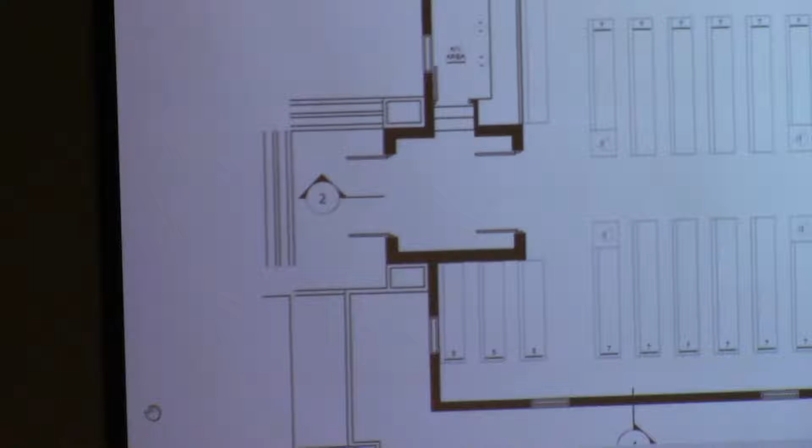Another item we've looked at is tucking this area in here for the new audio-visual soundboard. It would put this area in the back of the church, in a spot where they could see and hear the service, but tucked out of the way so they can monitor the service, the volume, the lights, et cetera. So that's the second component for the AV, the audio-visual sound control area.

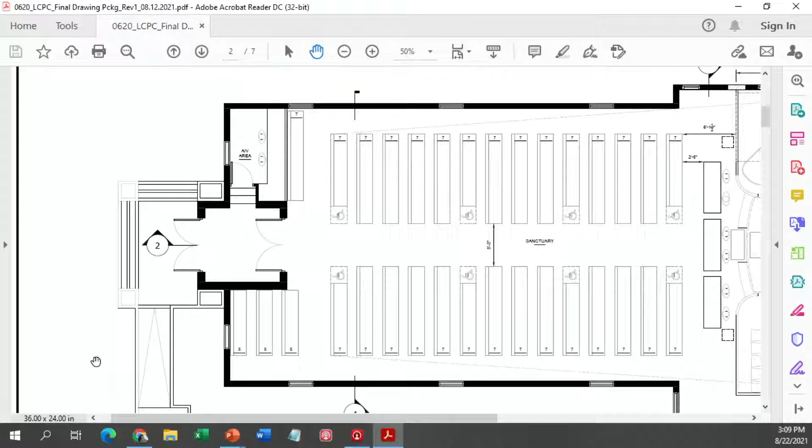Now, one of the things I'd like to do, and I apologize for not doing this from the beginning, Bart and Ken, if you could zoom out and show the whole plan, I wanted to set the precedent. Looking at the perimeter of the building, this notch here and this notch here represent the end of the original building, the original sanctuary, and where the Sunday school part or offices begin. Does that make sense for you guys?

So what we were able to do is grow the sanctuary and the stage area right here. We're taking this area out and moving back. So for reference, from this notch backward is the sanctuary area, and from this notch forward is offices, classrooms, etc. Now, what did we do to the sanctuary, and how did we accomplish this?

We're at the front door, we've tucked in the AV, and we've got a central aisle. Now what we have is two aisles, and the pews go all the way to the wall. If you look here, the central aisle is 6 feet wide, and the side aisles here are 3 feet wide.

So from this area back, what I want to point out is two additional areas for storage. Whether it's choir, handbell, or sanctuary, we were able to accommodate a storage here and then a closet storage here as well.

One of the things you'll see in this back area is a set of steps here. Because of the way we have the choir area on risers, so that everyone can project that beautiful voice into the sanctuary, each one of these areas is a step up. So when the choir filters in, they've got to be up at this level.

But here we have used this side or aisle area to accommodate the installation of an ADA accessible ramp. And as you see, tucked here are the stairs up. But once you start here and rise up, all this area is on the same level. This area starts to rise up with the steps, and then these steps of access meet it in the back. So what we've tried to do is accommodate multiple things with the steps, the risers, and the ramp, to accommodate as much as absolutely possible.

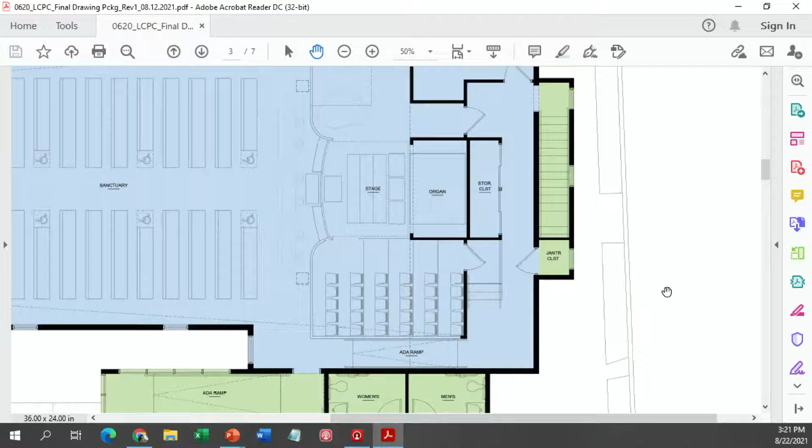Now, one of the things that is new is this back area here. And when I say new, everything we've talked about to this point has taken place within the existing structure. Ken, if you could zoom out so we could see the whole thing, that'd be a great indication.

So the color coding of all the light blue here, that is within the existing perimeter of the church as you see it right now. The only new exterior additions are the small sliver of green here in the back, which is the back stair access that will allow circulation from this level down to the lower level. We will bump out in the back just enough to accommodate the stair, and also accommodate a janitor's closet for mop, sink, and cleaning supplies for the sanctuary level.

So the light blue is all existing. The green is new, and we'll get to this area next.

But before we move on to the lower level, let's recap: central aisle, central entry, AV crow's nest soundboard area, increased seating, ADA access around the aisles, area for handbells, increased stage, piano, organ, storage, 30 in the choir, 18 in the risers, ADA access, additional storage, and basement access.

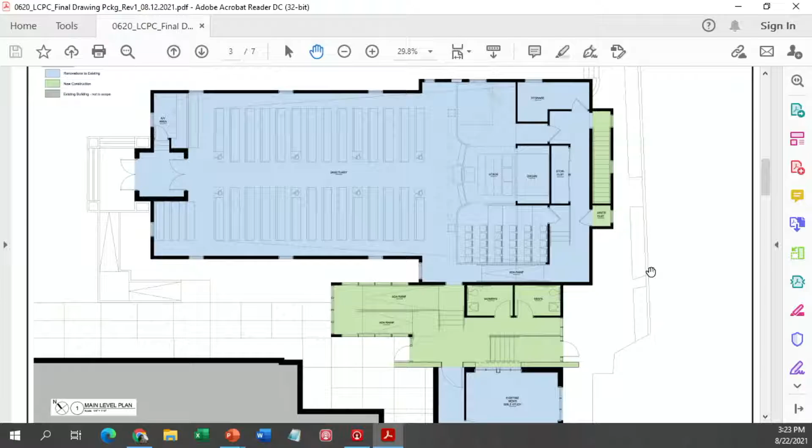So let's go back to the original plan and zoom in on this area. This is the existing edge of the back — I'm calling it the Sunday school section, though I don't know if that's the official name, but it's the back area of the church. What we were able to do in trying to connect the sanctuary to this new facility, without having to go outside but still meeting ADA accessibility, is the following.

We would create a side entry here that comes to a landing and steps down into a lower landing foyer. But from this level, because of the height difference, we'd need an enclosed switchback ramp. This ramp would be an enclosed structure coming into a foyer, and then we could go into this building with a separate entry.

Also on this level, we can now accommodate a men's and women's ADA accessible restroom that can be accessed from the sanctuary, which is ADA accessible, either via this ramp here or here.

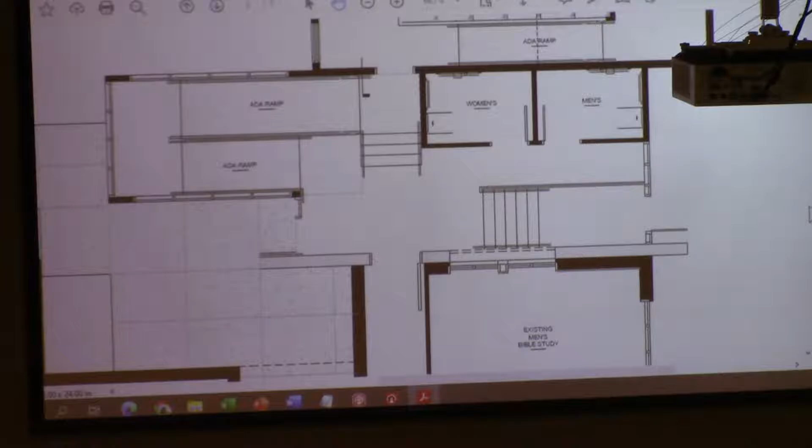I also want to point out, moving forward, we've looked at some initial code items. Bart and Ken, can you zoom out just a little bit? Katie, I do apologize.

All right, perfect, Katie. So in the outline of the existing building, the existing sanctuary — this is the outline of what I'm calling the annex building. When these two touch each other, all that square footage becomes one building.

So to accommodate making changes to the sanctuary touching this building, what we propose, so that we don't have to do more than we actually need to, is that this wall here would basically be a building separation wall. From the new build into the annex, this building separation wall creates a break — so this is one building, and this is still one building.

What that wall does is give us flexibility without having to create extra work required by code because of the total square footage of the two combined. That wall still allows us to look at those buildings as two separate buildings. So that's what this element is here.

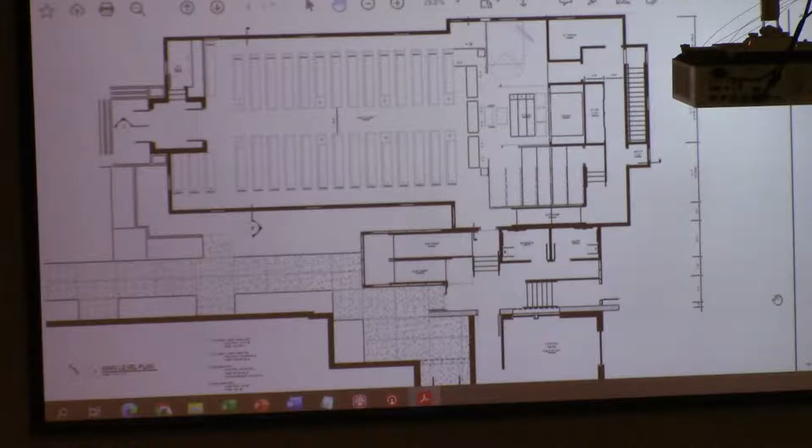So once again, in summary, those are the pieces, parts, and components that over the last several months the committee looked at, going through multiple iterations to get to this point today. So I think we've touched on everything on the main level — if not, we can come back to it. But now, Katie, if we'll go to the basement floor, then we'll come back to the sections.

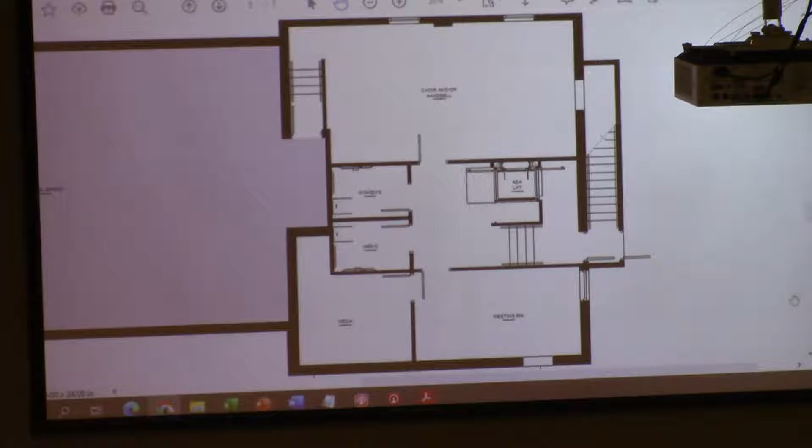What this does for us is it gives ADA accessibility, but with the height difference, it doesn't eat up the basement with a ramp. Let me see, 1, 2, 3, 4.

We're about 3 feet plus or minus. To meet ADA accessibility with a ramp, it would take up about 30 to 36 lineal feet of ramp. So what we've done is create this landing area where an ADA lift can be installed now or could be installed later. That was the point of giving ADA accessibility to every level of your facility in this renovation.

So once you come down to this area, we've tucked in a couple of ADA restrooms, and then this lower level would have a large choir and handbell practice room here, still retaining the entry to the crawl space to get into the mechanical areas under the existing sanctuary.

But we've also accommodated another meeting room downstairs, and then this corner is packed full of mechanical and plumbing as it is now. So we've just kind of retained that corner as a mechanical space.

With this area and the sanctuary area, these are the two levels that kind of remain as part of this overall sanctuary, choir, and lower level basement renovation.

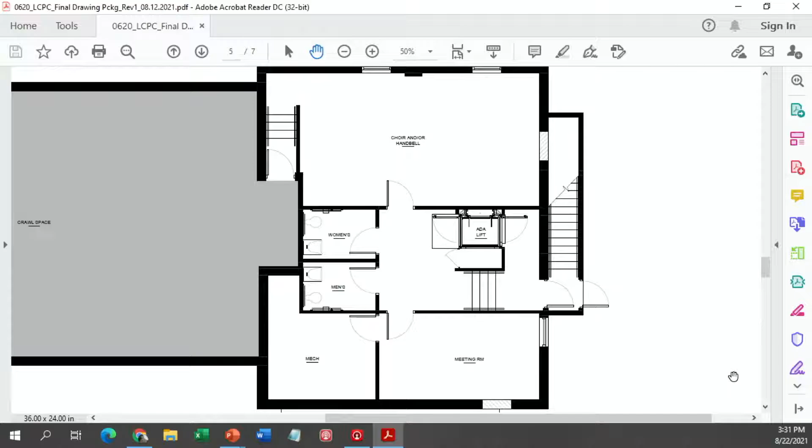The only two components I want to show you guys is a longitudinal section and then a cross section. So Katie, if you'll go back to that one and then just zoom out, I can touch on this one first. So what this drawing represents is literally we take the sanctuary, cut it down the middle.

We're looking into the side of the structure. So what you see is the entry, then you see the front doors, and then you see the new doors into the central aisle area. And then this level here represents the step up into the AV area on the other side of the entry.

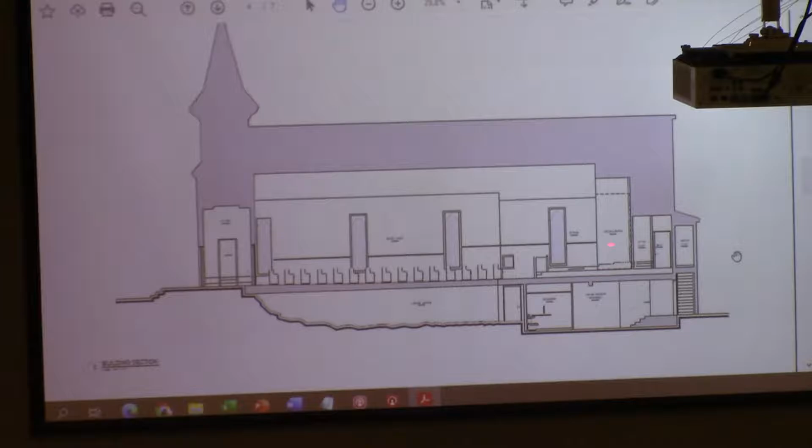Now this area here kind of represents where that back Sunday school area starts and stops now. And here you can see how we've opened that up and moved forward — from this point forward, all of this is here forward. So this is how we've gained that area, by taking out that back wall of the sanctuary and just moving everything forward.

This is a cross-section of the stage area, step up, kind of the railing and banister as it is right now, still retaining the area and the space that you have, the height, the shape of the ceiling, still having the stained glass windows exposed.

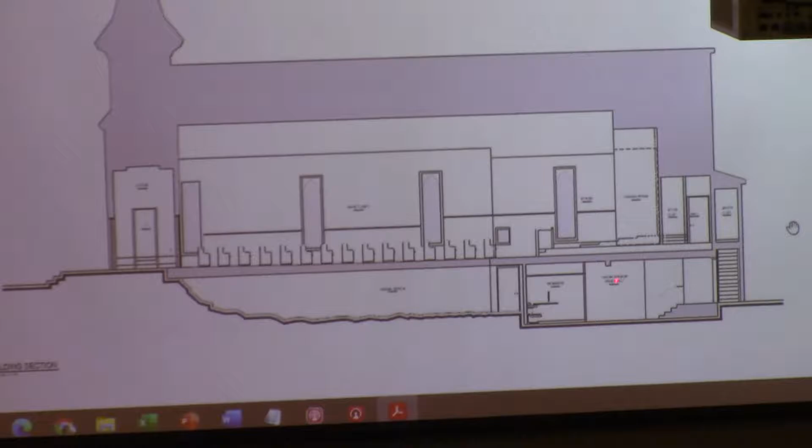And then this represents the area below that cuts through the restroom and the choir area, and this represents the steps and entry into that landing area off of Wharf. And then this represents the stairs going up, and that back storage closet and hallway there in the back, in section profile.

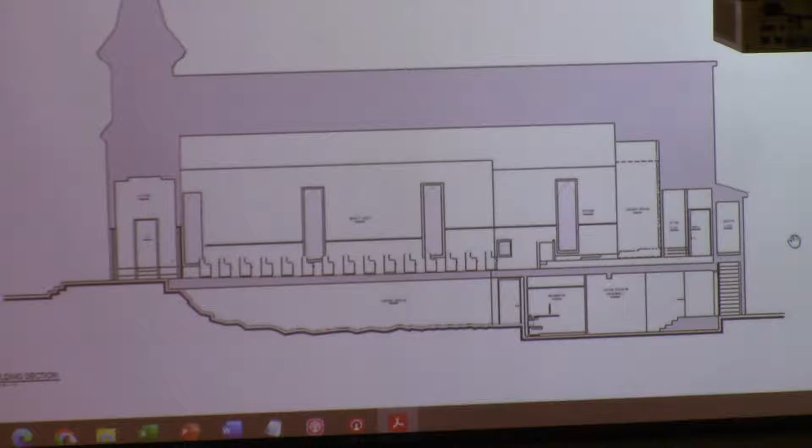Now there's one more cross section. Katie, if you don't mind, zoom into this one right here. So this cross section is basically cut right in front of the stage area, looking at the podium and looking at the organ.

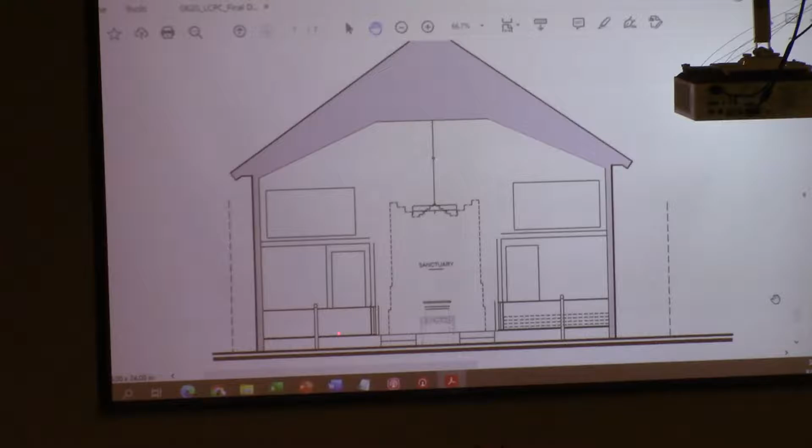This kind of represents the existing archway that's there. The dash area represents the pipes of the organ. These areas indicate the height of the stage, the banisters. This dash area represents the risers, as on the choir side, how you would step up. Those are behind that podium.

And then these areas shown here would be a placement location for monitors to be placed within the sanctuary. At this point, there's still a number of avenues, a number of ways to approach AV information, screens, et cetera. There's as many as the day is long.

But just as a placeholder, moving the back where the arch is and the area that's left over, and using the existing profile and shape of the roof, we've plugged in an area where monitors could now be placed.

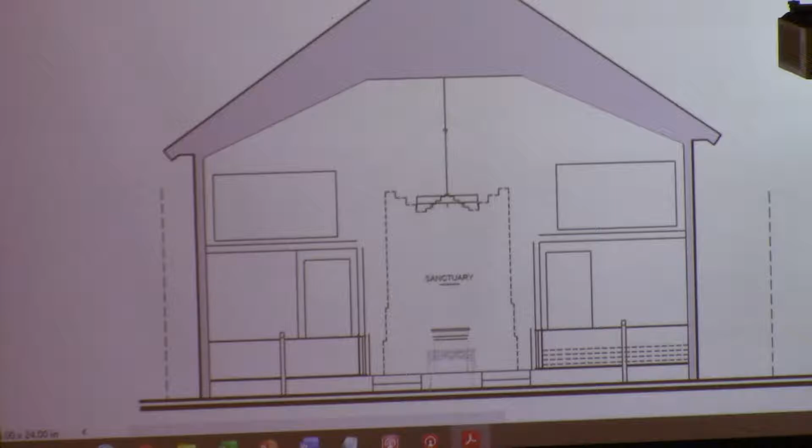So, in closing, I think from start to finish, we've touched almost 25 different components and areas, from the smallest of putting in a double door to the opening up of the existing sanctuary.

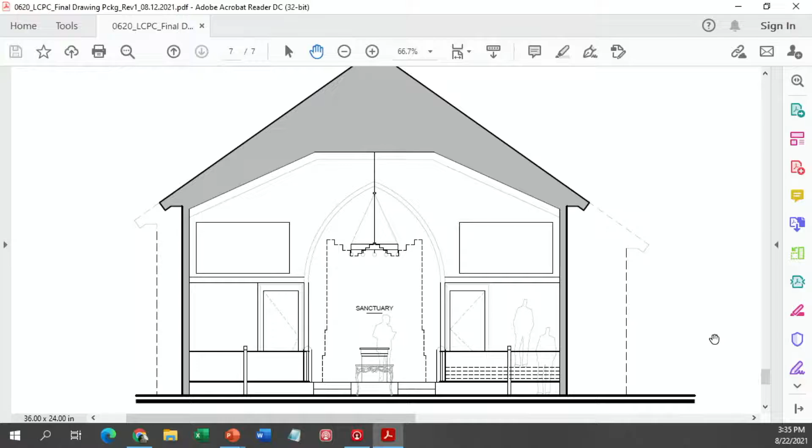We went through, I think, 4 or 5 reiterations to get to this point. I'll be the first to tell you, I haven't walked on water lately, and I don't care to try, because all of us in this room know what they did to the guy that did walk on water. However, we are open to any and all questions you may have. Lee accuses me of being too accommodating, but I always told him, I'll stay for supper if you need me to.

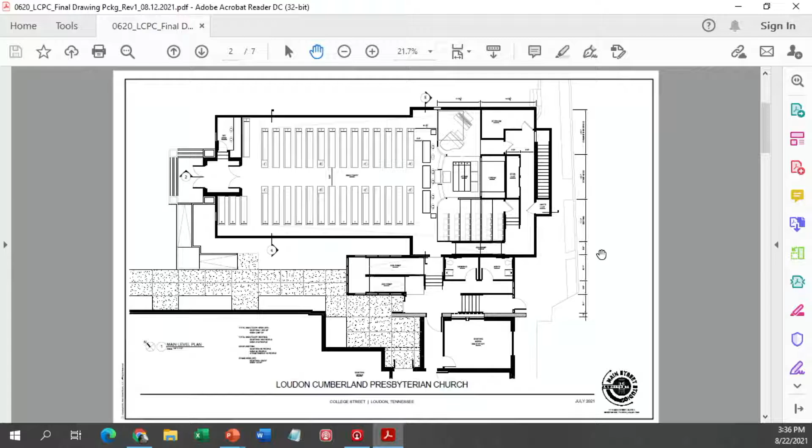Katie, if you could go back to the overall floor plan and zoom out so you can see all that area. I will open up the floor for any questions at this time. I don't know if Mark fills them, or I fill them, or Lee fills them, but we'll probably have Sam fill them. So questions about the architectural drawings, I'll bring the mic to you so everybody can hear.

I was just wondering, right now the one place that's not handicap accessible, that men's Bible study, that outside wall is the only 2 handicap parking spots around here. Has anybody thought about moving those handicap parking spots somewhere else?

I'm not sure that's one of your assignments that's been given to you, but we can address that here in just a minute. You can reiterate that people parked on the Wharf Street side have to maneuver steps to come in. That's what you're talking about? Well, they have those steps now and a ramp, right? Okay, we'll address that here separately. That may be as easy as just relocation of the parking stalls, but it's a very good point. Thank you very much, and I don't think it's been brought up, so thank you for bringing it up.

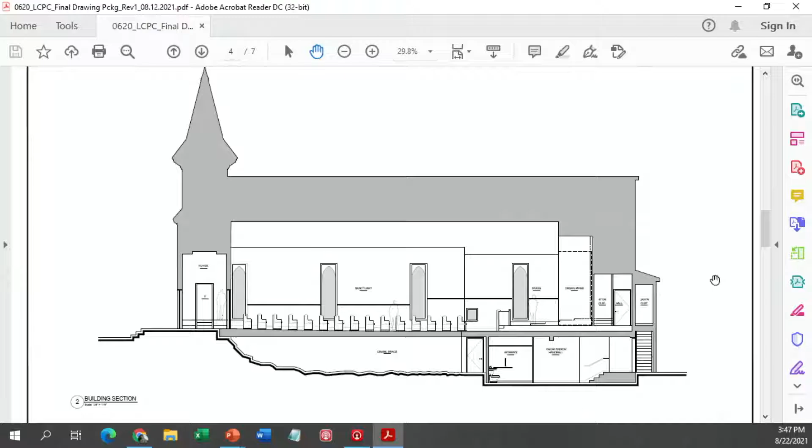So, any other questions? Yes. Have they ever considered replacing that?

It was. Yeah, the slate roof was replaced about 3 years ago with a 50-year warranty, I believe. Does that sound right? Yeah. The leak should be fixed—I haven't seen anything coming through.

All right, any other questions for Sam? If not, we're going to let Sam go home. Any more questions for Sam while he's here?

How are we going to access the steeple, Sam? Right now we access it in the very front, just going straight up. That, as far as I know, nothing really changed with that. The only renovation we did is on the back of the church, if we only had a plan to look at, the AV storage there, and then creating this access.

I know there's a hatch here. Is that hatch what's in question? For those who don't know, there is a door in the wall right there, but I think most people have historically accessed it from a hole in the roof. Going up in the ceiling of the foyer. Am I right, Bart? You do it on the side. So it's a side door, a side hatch. It's here, correct? Because when the structural engineer was here, he got up into this.

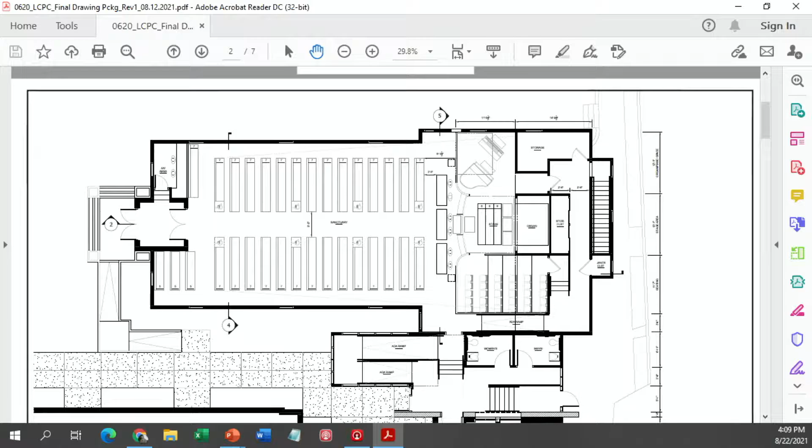But would you like to be on that committee? Yes. So, one thing I'm not ready to do is say what color it is, what the pews are going to look like — no, I don't think we're there yet.

Paul brought up a good point about the chairs, and his point was well noted by me, because I've had bad knees in the past, and he said you can't get out of a chair as easy as you can get out of the pew. And so I think pews are probably the better choice because of that.

But I also imagine — anybody here when the sanctuary went from chairs to pews? Always pews as long as you can remember. Some of the old chairs upstairs in some of the old rooms are chairs that used to be in the sanctuary, as I understand it from pictures, but maybe I'm remembering that wrong — maybe Sunday school rooms. But anyway, so no, that decision hadn't been made yet.

I imagine there's going to be a lot of continued work as we get through the project, and as we get into it, on are we leaving the colors the same? Are we using the same furniture? Do we get new this, that, and the other? We've said for years that there needs to be a new pulpit over there. Bart, agree? New pulpit — oh, pulpit over here. Well, that one over there takes 3 men and a boy to move, and it falls apart on you, but it works. But I imagine that over time, that'll be stuff like that, decisions that have to be made on. I don't think anybody's talked about it yet.

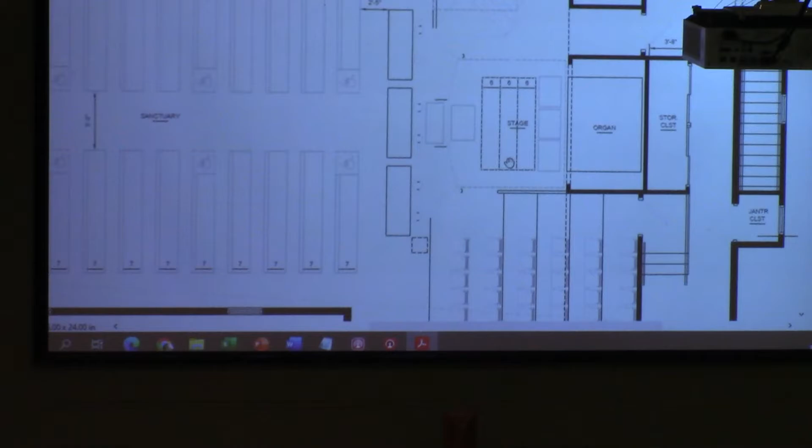The risers drawn in the middle weren't part of our regular service, just like the handbell tables aren't part of our service every Sunday, but we wanted to know where we'd put them when we had them. That's where they would go. That would be open space, with the front open from those tables. They'd theoretically be under the stage where the piano is, and that's all open spacing, so when we have activities on stage, whether children, choir, or a play, we actually have space to do it in. Right now we're very limited on that.

Any other questions? Russ? I don't have another question, but I just wanted to thank the committee that worked on it. I really think it's a really good plan, considering everything that went into it.

Any other comments? Steve, anything else? Lee? I'm going to close it unless you guys have something else. It's a joy to be part of your church at this time. I've not been part of a building project like this, so I'm a rookie, but I have sources to glean from. I'm learning a lot as we go, and I'm not trying to push you where you don't want to go. If this is where you want to go, I'm with you on it.

And so I think Steve said it right, that we've got to do something for the generations to follow, and it's just how much and how soon are we going to get her done. Did you want to add something, Martha?

I appreciate the fact that we're looking at preserving what we have, and that's what we're talking about doing, making a church we can be proud of and invite others to. Bo brought that up in a meeting this week. Guys, it's a privilege to work on that with you and be in ministry here with you.